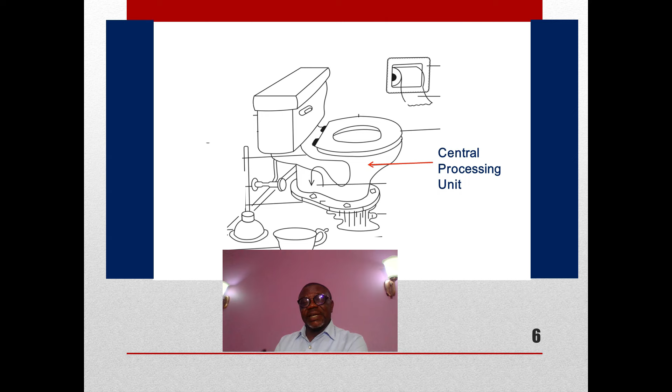Now, if you look at this picture, you see that there is a place where the reaction takes place. In computer terminology, the place where the reaction takes place is called the Central Processing Unit, CPU. So if you see or hear CPU, you liken it to this restroom where the action takes place.

Then, after that action has taken place, the normal thing is you try to do away with it. And what happens? Water will flow from the water container and remove whatever. That water flow is akin to saying normal flow of operation in your computer system. So in the computer, by the time you input your data, you hit your enter key, some processes take place and a result is given. That is the normal flow of operation.

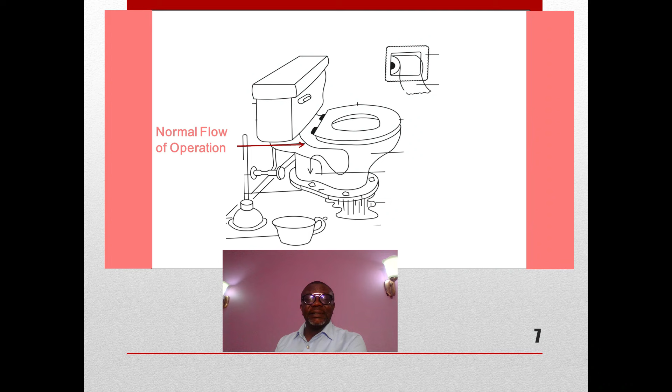So the link between the water sink and the central processing system, in this case, is tagged the normal flow of operation. Now, for that flow of operation to take place, there must be a main storage where you store the water, in the figure we are seeing. There must be a function key, the key where you press and action takes place. So in your computer, if you look at the keyboard, you see the function keys from F1 to F12. That function keys help you to perform related activities instead of keying in or giving a command.

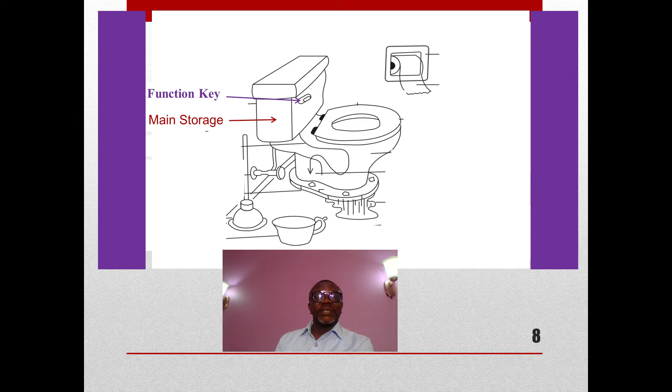By the time you just press that function key, it carries out a particular activity. For instance, a function key can help you increase the brightness of your screen. A function key can help you do a save of what you have done. So in your computer, there are 12 such function keys. But in the analogy we are drawing here, you see that the button you press to do the flushing is the function key. In some of these systems, you have three of it or different keys, each one you press performs a different function, probably relating to the quantity of water you inject into the system.

So we have there the main storage. When we talk of the main storage, you see that in the computer system, you store data or the software, or the tools you use to do your work. In this case, the tool you use to do your work is the water, which is in the water sink.

So if you press your function key, what is in the main storage takes place. Now, you also see that small plastic that you bring down or raise up when you want to use the system, depending on the usage you want to apply, is called the user interface. You are the user. You are interfacing with the system to do what you want here.

So in computer parlance, user interface could be those graphical user interfaces that show you the output, or the means through which you put in data into the system. That interface where you meet your computer is called the user interface. So it could be in form of an input device or an output device.

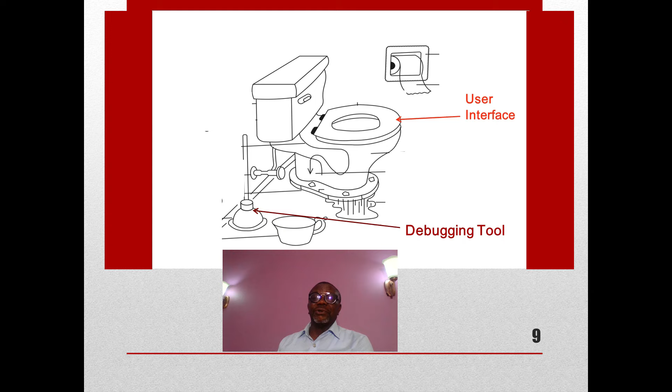These debugging tools are mainly softwares that help you debug, find errors, and correct them. So the process of finding errors and correcting them in the program you have written is known as debugging. So in the restroom, this thing here is a means of debugging. By debugging here, we mean if there is a blockage, you use it to make sure that you restore the flow. So you see the user interface and the debugging tool.

Now, again, you see where you put your soft tissue. In the computer parlance, we call it application software. It is similar to application software. Now, what is application software? It is that software developed by experienced professionals to help you do the work you want to do very easily. So here, you see the tissue paper here can be of different qualities, but you use it to apply while you are in the restroom, either to clean your hand or any other thing. So we say that it is close to, you can use it to remember what application software is.

Then when you press your function key and the water enters into the central processing system, and instead of going out through the normal process, some leakages occur. Such leakages are akin to overflow in computer parlance, which in most cases we call input-output error. You have pressed your function key, the normal flow of processes took water into the central processing unit, but instead of everything going out, there is a leak. Then you say in computer parlance that there is an overflow, which is akin to input-output error, otherwise known as I/O error.

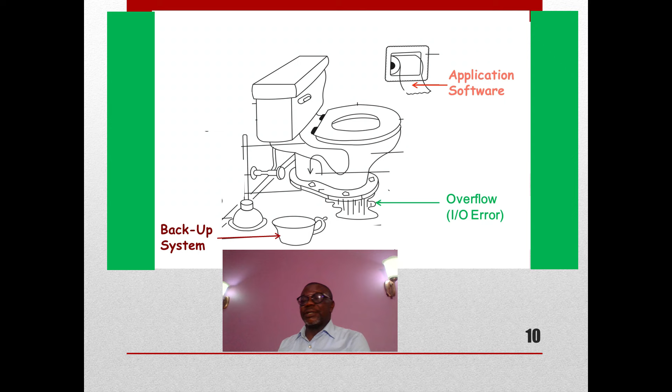So now, if you enter your restroom, you see that normally where water enters from the external source into the water storage tank, there is a knob that you normally turn if there is an overflow or underflow. So it is akin to surge control in computer parlance.

Of course, in computer systems, there is how you do your work. Probably at times you have a virus, you have some malware, you have to install a firewall. So those things are like the control of what comes into your system from external sources. So you need to control it. In the computer system, we call it a surge control device.

Now, we have seen previously the application software, where you now put the application software that your computer takes from there to process, because the computer takes from where you put your application software to the CPU, central processing unit, to process. So where you keep that is the storage case.

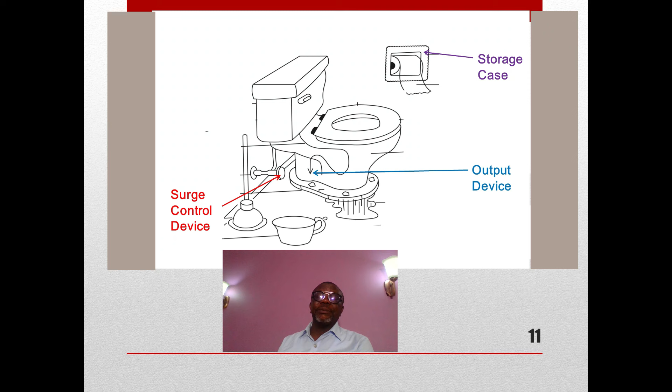So if you go to our engineering lecture series and look up our structure of general purpose computers, you will see all the possible output devices that are there.

So if you now look very closely, you remember that we have seen the user interface. It is from there that the user now inputs into the central processing system. If you look at the input port, you see how it is pointed into the central processing unit. The input port enables you, the user, who has been interfaced to the system, to input whatever you want to do.

Now, if you look at the base of the central processing unit of our diagram, you see that there is something that is really not part of the system, but is used to hold the system firm to the ground. If that something holding the system firm to the ground is not working very well, that is when we have an error, which we call the overflow. That's something that is holding the system firm to the ground, but is not really part of the system, but necessary for the system to work.

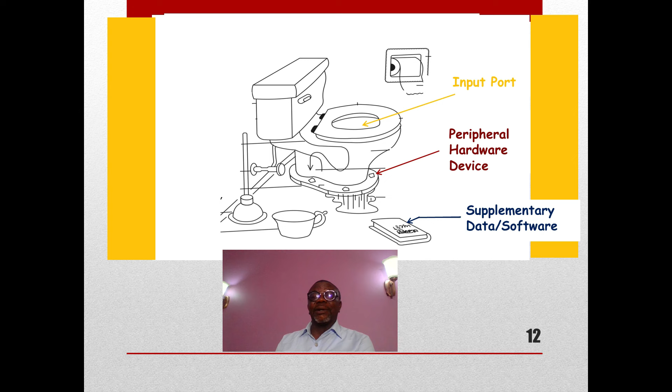So in the restroom, some people normally put a guide of how to use it. That guide serves as the supplementary software because we have seen before the application software that helps you perform your activities, but sometimes you need this supplementary software to be able to read and understand how to operate the systems.

So if you now look at it, you now see the whole thing around. You have seen the input port, you've seen the function key, the main storage, normal flow of operation, surge control, peripheral hardware, debugging tools, system backup, supplementary data, overflow or I/O error, the output, the central processing unit, the user interface, the application software, the storage case.

So with that, you see that it is easy for you now to remember all the jargons you normally hear when you are discussing computer technology. As you do that, you will see that it becomes easy for you to remember, and it's fun like using your restroom to remember all the aspects of the computer terminology.

But if you look here, you see that one important thing is missing that is very common in computer terminologies, but it is not really part of the computer. By now, I guess you should know what it is. Let's go.

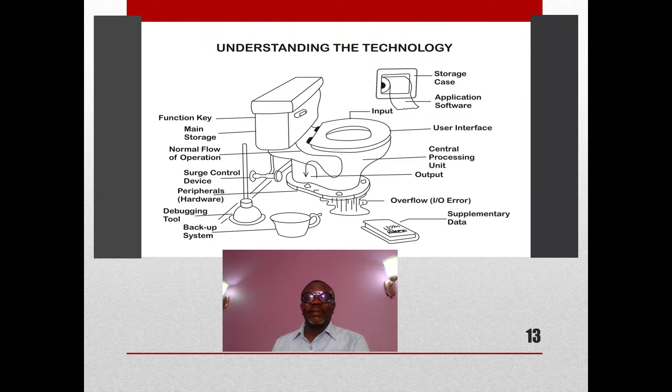If you look at what we have discussed, you see that something is missing. While we were talking about computer parts, in the restroom, something entered, and that is a mouse. What happened? It scattered so many things, moved very, very fast around the place.

So that thing that is not part of the computer, but helps to move things very fast, more especially the cursor within the screen, used to input into the system, used to perform many functions, but not necessarily part of the system, was named after a mouse entered into the restroom to scatter things. And the person shouted, 'Ah, mouse.' And that is why the mouse you use in your computer has the shape of a real mouse.

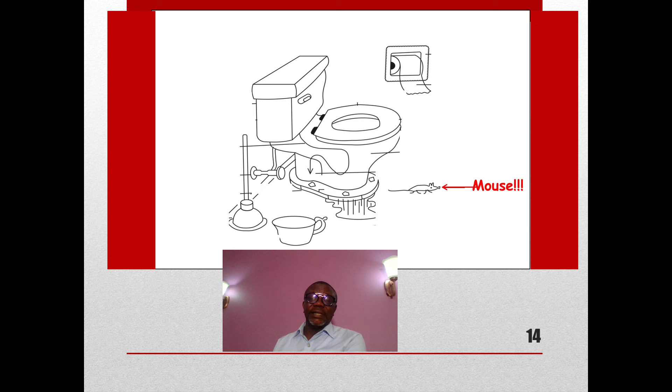So if you now include that mouse, you can see that it is not attached to the whole design, but is a separate entity on its own. So you now have the final system that helps you to understand the computer technology.

We hope that this is fun for you, that you make it available to other people, share with them so that they will become conversant with computer terminologies by just understanding their restroom paradigm.